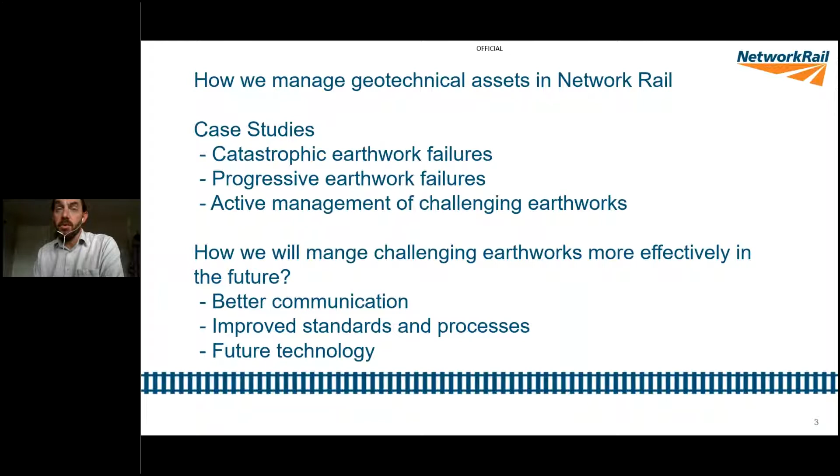failures, and a couple of sites where active management and collaboration between the track teams and the geotechnical teams is essential to manage safety and performance, and then a little bit about some of the changes that are happening in Network Rail over the next few years to further improve the way we do things.

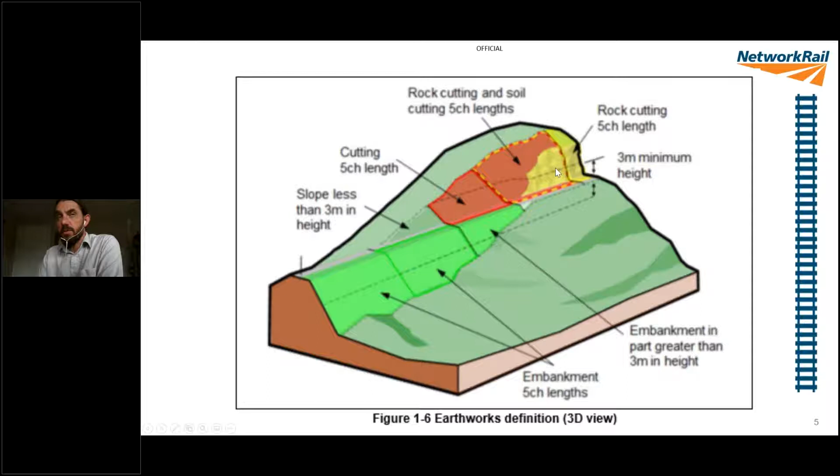So we've always got 2 metrics playing. We've got the number of 5 chains, and then the number of actual earthwork assets, which is the number of individual items which are examined.

And this is sort of the same thing represented as a more pictorial diagram, just again making the point that the whole railway is broken into 5 chains, but within any given 5 chain, we might, for instance, here have a soil cutting asset within the 5 chain and an embankment asset within the 5 chain.

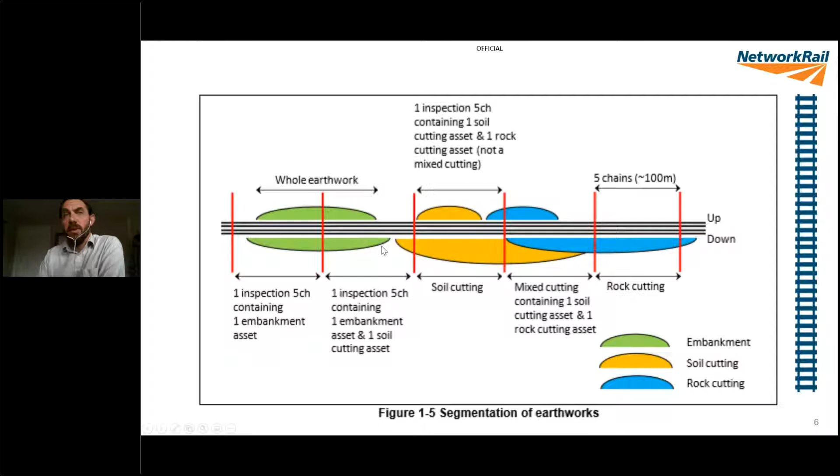This looks a bit dull, but it's worth pointing out. So earthwork hazard category, or EHC, it's an A to E scale. It's sort of a non-dimensional number, I guess, but A category assets are those that present the lowest risk of failure and are those in the best condition. And these assets, as you can see here, for soil cuttings in a category A condition, we only examine them once in 10 years.

Similarly, for an embankment in a condition A, so a good condition embankment is examined 10 yearly. And then for rock cuttings, 5 yearly, so once a control period. And then once we get into D and E category assets, so these are assets that represent a higher risk of failure, they're all examined annually. And then for the mid-table, we examine our soil cuttings mid-table 3 yearly, mid-table rock cuttings every other year, and mid-table embankments 1 year in 5.

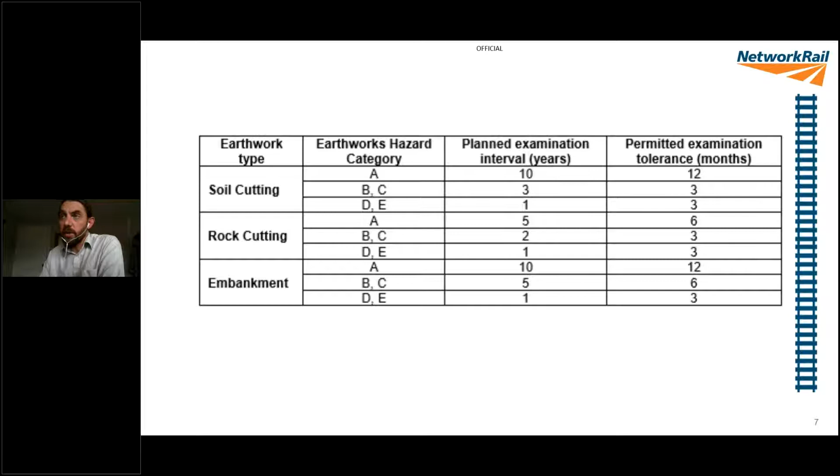And the reason I bring that up is just because from the perspective of the geotechnical team within Network Rail, our data is refreshed relatively infrequently, whereas for the track community, information is refreshed much more regularly. So the yellow fleet, the measurement trains are running around sort of 4 weekly in a lot of locations. So if we can make good use of the information that's collected by the track teams, we get information about our embankment stock more readily than we do from our own examination process.

And due to the spread of conditions on those assets, with 26,500 assets on southern region, we needed to undertake 7,359 examinations in the previous exam season. So that's 28% of the total asset base. So in terms of this diagram, what I've tried to say is if you've got your whole asset stock, you undertake some examinations. The vast majority of the examinations don't really tell you a great deal new, and those assets just move back into service.

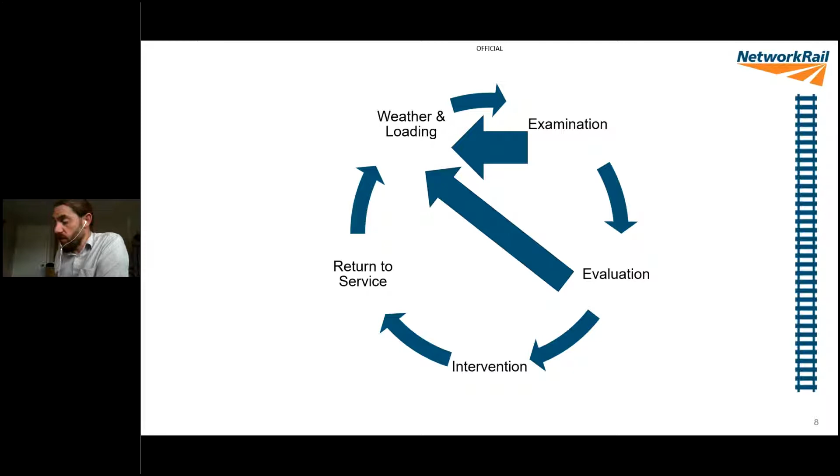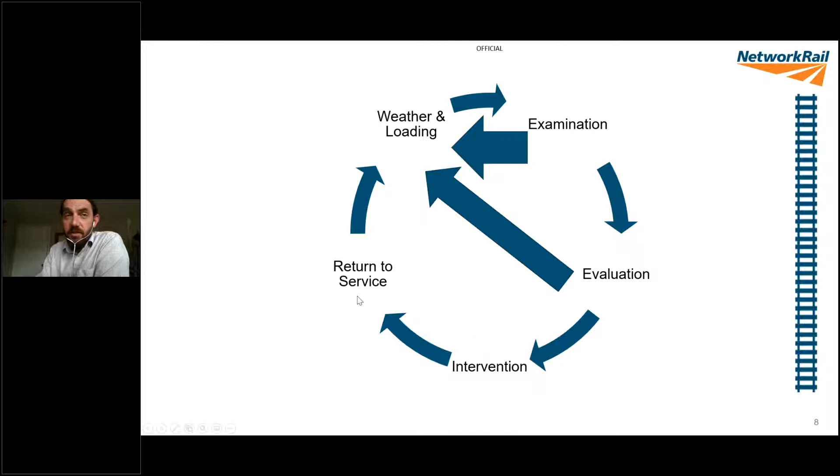And then the rest of this life cycle here, if an evaluation doesn't raise any particular concern, that asset will just return to service. If it does, then the evaluation is how we identify sites where an intervention is required. If we fix the thing, it then returns to service and goes back around the loop again.

So it factors in things like line speed, how wide the cess is, whether it's single line, twin, two track or four track, whether you're adjacent to a body of water that would make a derailment really problematic, or a structure where a derailment might result in a collision and all that sort of thing. And so this is the matrix that we use to drive our renewals work bank.

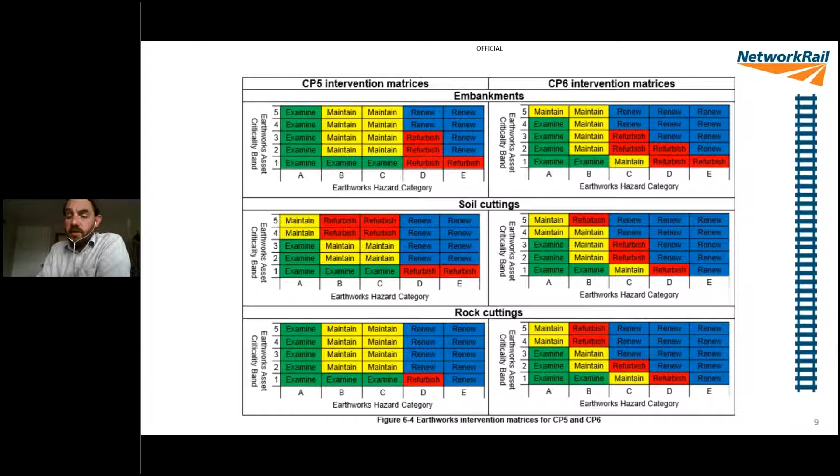And then within the middle we've got some assets where we'll take some light touch interventions to keep them ticking along, or some slightly more mid-table interventions in this refurb space. There's a separate matrix for the three different asset types, just because of the different risk profiles those assets present to the railway system.

So some case studies, and I really am going to have to rattle through these because each of these is probably worthy of an hour in its own right, but that's not the presentation we're doing today. So I'll really rattle through these and then sum up the incidents.

But this Botley Embankment failure from February 2014, so winter 2013-14 was extraordinarily wet for a prolonged period, and so a number of clay embankments in southern regions succumbed to that very long wet period. With this particular embankment, if you think the practicalities of a clay embankment, it's a relatively impermeable material topped off with a very permeable track formation.

So over the course of the winter 2013-14, all of the rain incident on the top soaked into the upper parts of the embankment, increasing its weight. And then this particular site is founded on clay, and the particular clay we've got down in this area, it's not far away from Fareham Tunnel actually, has got very low residual strength, so once it starts to fail, it tends to continue to fail.

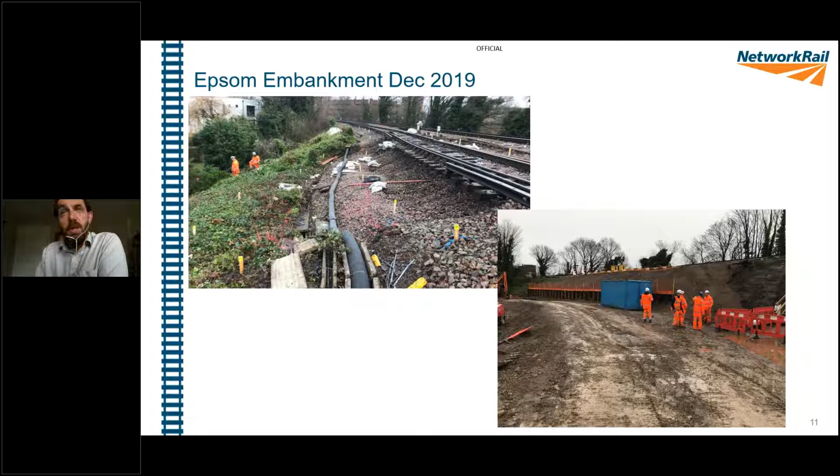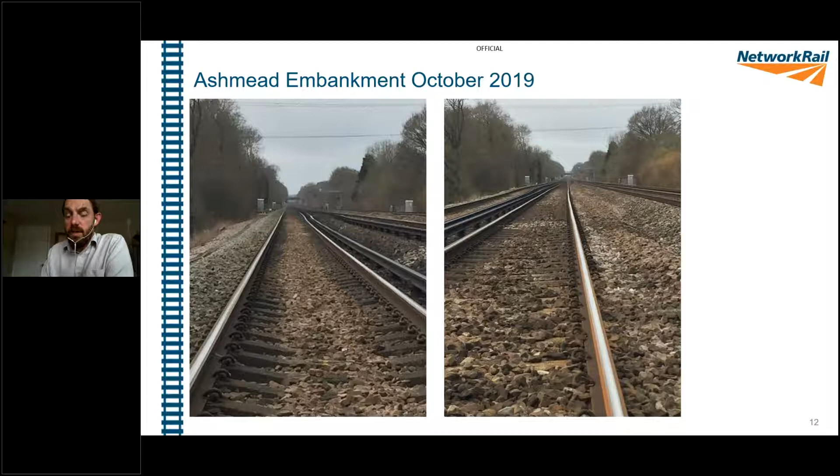So this site is a bit of a better news story, in so much as there was a really good working relationship between the track team and the geotechnical team. We had a planned piece of work in the workbank ready to repair this embankment. It just failed a month or so before we got to site, but we were able to maintain a service on the fast line, and the slow line was only closed for a limited period of time because of the planning that had already gone into the scheme that we were going to build.

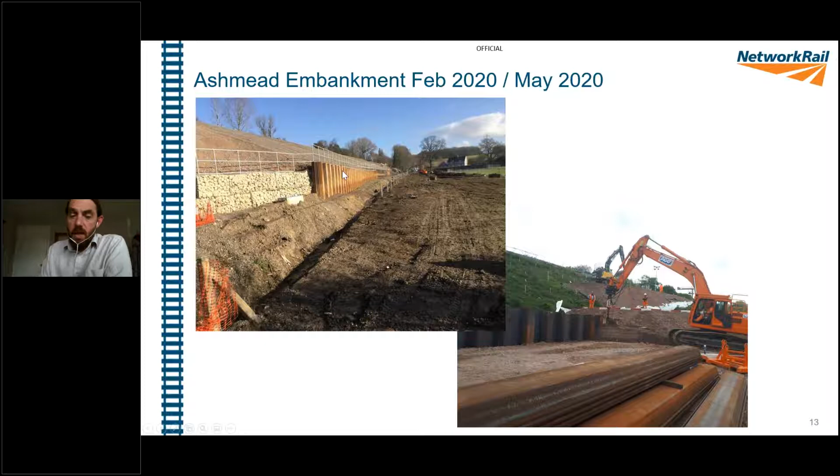I think it's fair to say that the working relationship between the TME that looks after the Woking and Guildford patch and the geotechnical team is pretty solid, due to the amount of challenges that the New Guildford line and the North Downs line present to both teams. But I think this is quite a nice example of where the communication between the two teams meant that we were able to identify quite early on in the development of this dip that there was a problem, and deliver an accelerated earthworks scheme that meant that we were able to continue to run a full train service through this site for the duration, other than, of course, some weekend and overnight possessions to do project type activity, but in planned possessions rather than needing to close the railway in an unplanned fashion.

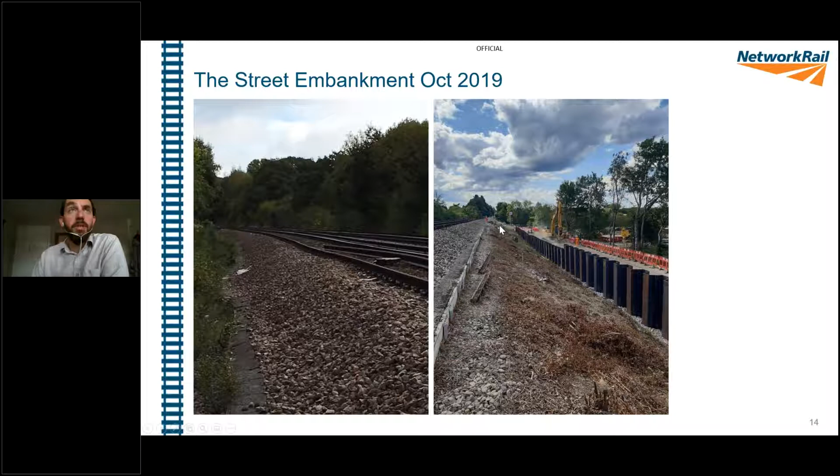So this is a really interesting site. So Bugley Bridge Embankment, BA2, on the Salisbury Exeter line, not far from Gillingham. It's 106 miles, something like that.

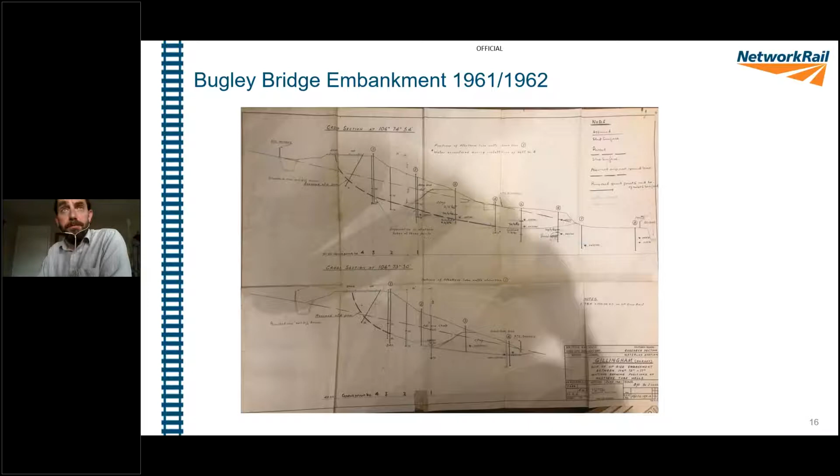So what we actually did on this site, as a short to medium term intervention, the track was slewed away from the edge of the embankment, into the centre of the historic track bed. As most people are probably aware, the Salisbury-Exeter line was constructed as a twin track railway, and it was singled in the 60s. And it just happens that in this area, the line that had been retained was the one at the high side of the embankment because of the hill up behind us.

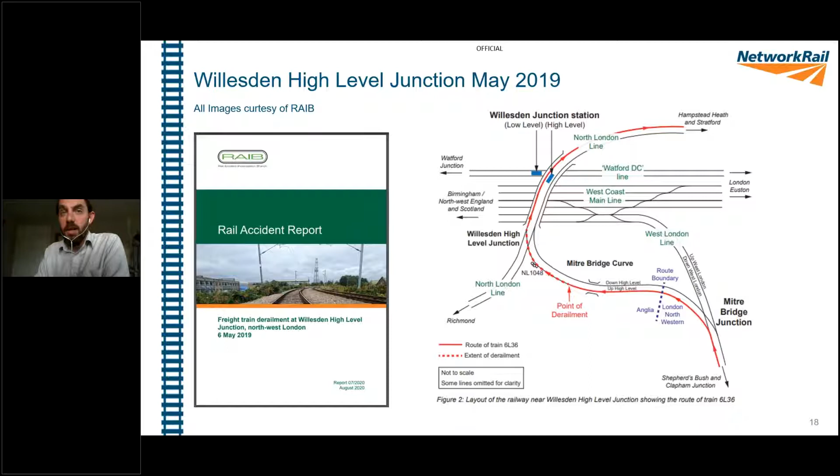But the nub of the problem here was that although both the geotechnical team and the track team were aware that there was a problem with this site, the two teams had not quite come to a common understanding about exactly who was doing what in terms of managing risk, hence the fact that further movement occurred and a freight wagon derailed, causing a fair bit of damage to the track and the S&C.

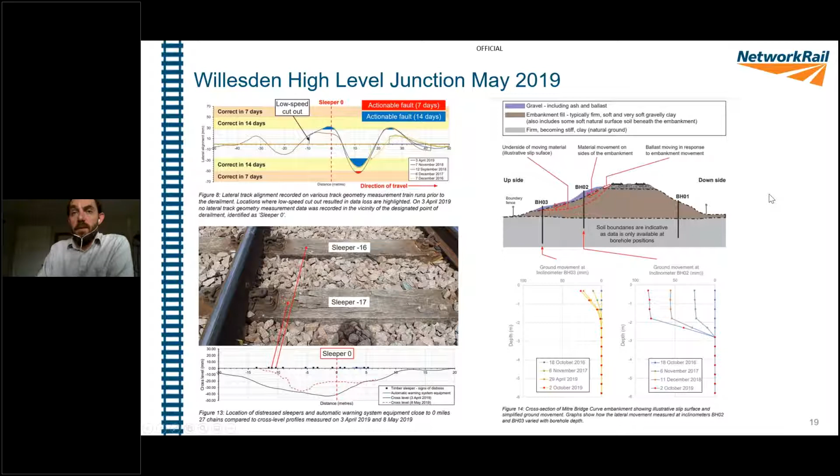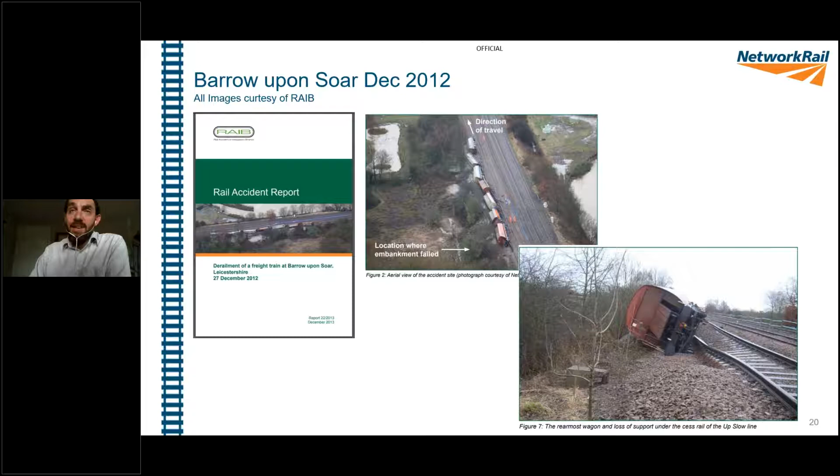And then the last case study. So, Barrow upon Soar, 2012 failure. So 2012-13 was another extraordinarily wet winter, and as can clearly be seen from this site, this embankment let go under an aggregate train, leaving the train lying on its side, and this is another example of where there was information within the business, within the track community, that hadn't made it into the heads of the geotechnical community,

and there's also some parallels here with the failure at Ashmead, in that this section of railway was widened at some point in its history, so the line that slipped, yes, it slipped under flood conditions, but there was a sort of weakness within the structure of the embankment because it had been widened with an additional road placed on the side of an existing embankment.

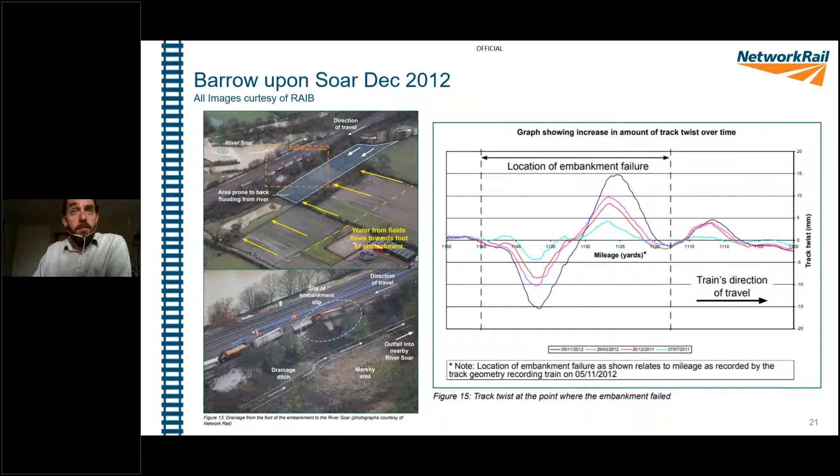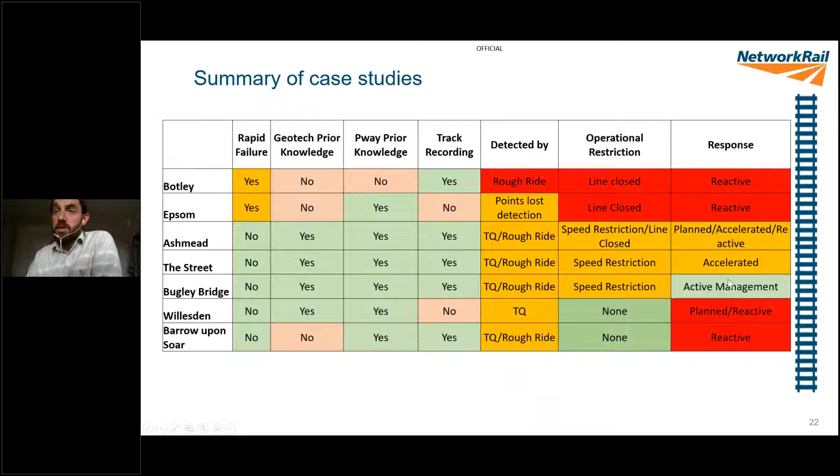So in addition to information that comes into the measurement trains and patrollers and everything else, we don't want to rely on information that comes in from in-service trains, but rough ride reporting does highlight worsening problems to us. Botley and Epsom, we both ended up with a line closed. And it's an error in my slide, but at Barrow clearly the site was closed as well. And then in the last column, I've tried to flag that we've had some reactive schemes, some accelerated schemes, and Bugley Bridge is where we've had to manage the site actively.

So what next? Off the back of the Willesden failure, there is a change to Network Rail standards, which will be published later this year, which will mandate a regular meeting between the track maintenance team and the geotech team, and that meeting will be used to establish management plans for problematic sites. In the vast majority of the business, these meetings happen anyway, but mandating it and mandating the establishment of management plans is the real change. So that should close some of the gap on communication.

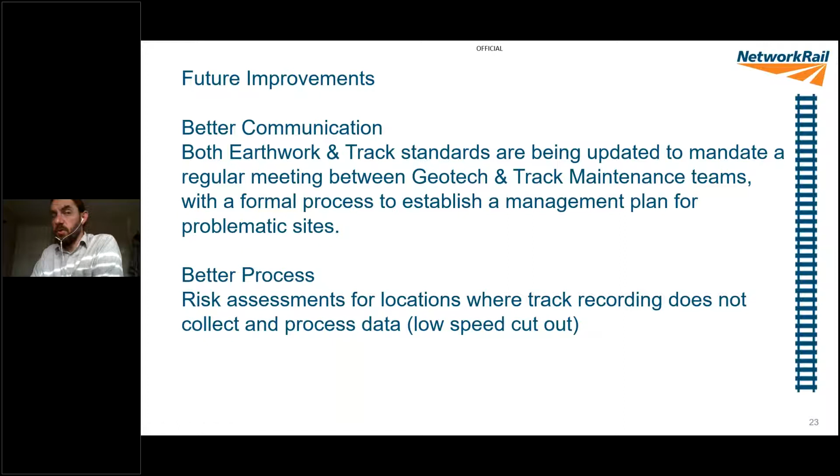This is not an area of my expertise at all, but in terms of areas where the track recording train cuts out at low speed, there's a change of standard, either recently released or imminent, to make sure those sites are properly risk assessed.

And then there's some things that are going to really help what we do in the future as well. So two bits of work which are both in, I suppose, advanced R&D stage, but we don't yet have a program to roll tools out to the business for use. But we've proved that it works, and more work will happen in the next few years to try and systemize and industrialize it.

But the first one is using track quality data from the recording trains, looking for signals in the track quality data that we can use with some confidence as precursors for failure. It's very easy to look at track quality data after a failure and say, yeah, you could have seen that. But actually, if you don't have quite sophisticated analysis, you end up with a lot of false positives, and we don't have the capacity to deal with multiple false positives.

And then the next thing, which looks like it's got some real potential, is we've now got really good LiDAR data for most of the railway flown in winter, so the vegetation is at its minimum, and we've been able to prove that if you take LiDAR images, so it's a model of the ground created using laser scanning from an aircraft,

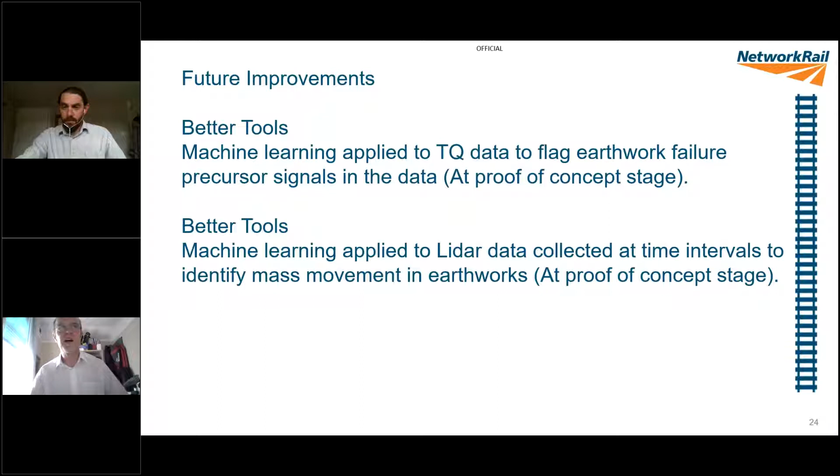So we'll start off, Hector, with a question from Paul Ebbott. And Paul has asked, design of embankment sheet pile walls. I recall back in around 2000 on Transport for London, we had a policy of installing castellated embankment sheet pile walls. Do you have any comment on this?

Any comments? Yeah, so I know that there is an arrangement of sheet piles which is sometimes referred to as hit and miss, which I'm guessing is the same thing. Its use was licensed by one of the big piling contractors, so they'd patented that arrangement of sheet piles. I'll be entirely honest, I don't know the full details, but it was developed for works undertaken on the M25, and it may or may not have been Balfour Beatty that hold the license for undertaking sheet piling of that nature.

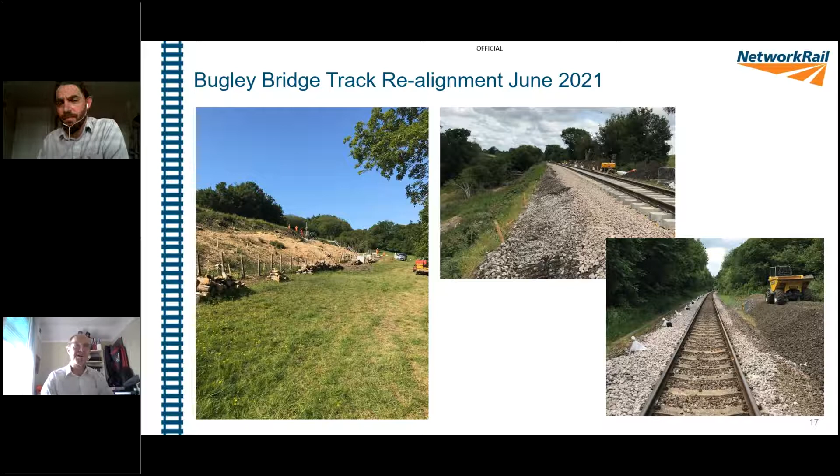You've given us a really fascinating talk this evening with really good illustrations, and a rather jaw-dropping photo of Botley, which I hadn't seen before, an absolutely enormous scope of work there. The scale of intervention now is so different from the scale of intervention I remember seeing as a young engineer training way back in the 80s, where one particular favourite of mine was 3 track panels piled one on top of another and then backfilled from the top with ballast.

But that's on the Reading line, isn't it? It could well be, yes. It's standing the test of time. Yes.

But the interventions that you've described here are clearly highly designed and engineered, and should be securing the railway for many years to come. So thank you very much for your presentation.